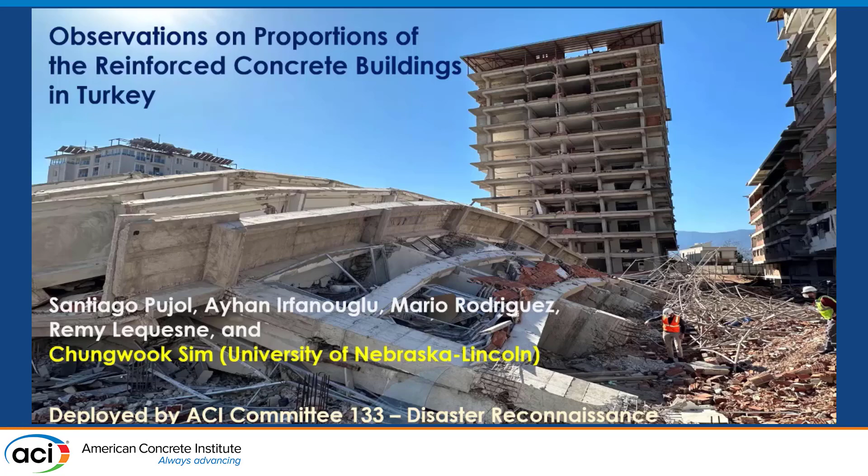I'm an associate professor at University of Nebraska-Lincoln, and these are our team members deployed from ACI 133 Disaster Reconnaissance Committee. I will present mainly our findings on the proportions of reinforced concrete buildings we observed in Turkey.

I may have a slight overlap, but I do want to touch on the fact that we were base camped in Gaziantep. We were visiting different cities that Remy mentioned, and he was mentioning the peak ground velocity demand exceeding the maximum considered earthquake.

These are the cities that we visited, and these dots are the buildings that we surveyed as a team of 40 members. So these are the cities that we visited, quite a lot.

The city of Antakya, which had the most severe damage you saw from Remy's presentation, is about 3.5 hours from Gaziantep, so we spent 2 days there.

So these are the 10 cities we visited. After the 1999 earthquake in Turkey, they installed a lot of ground motion stations along the fault line.

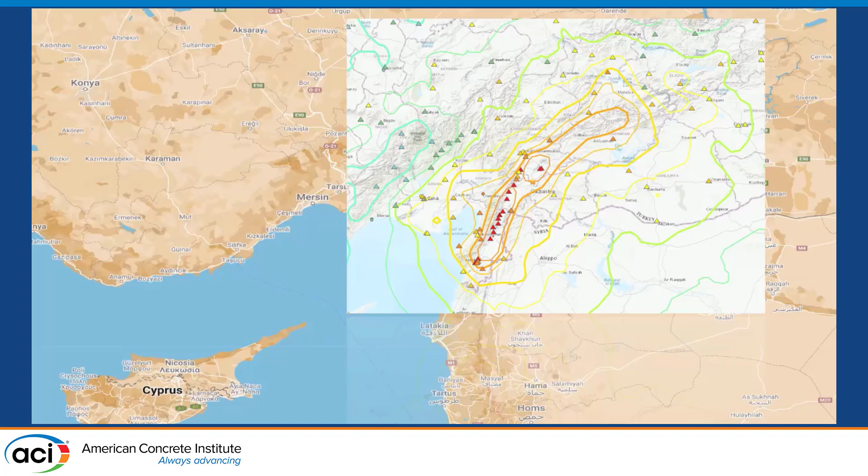These triangles are all the ground motion stations installed right next to the fault, where we can retrieve information on peak ground acceleration and peak ground velocity. This circle is where the first earthquake epicenter of moment magnitude 7.8 happened.

These are the cities that we visited. This was from the second earthquake, about 9.5 hours apart, with a moment magnitude of 7.5. Both earthquakes were huge, and some claim it can be considered a twin earthquake.

Before I start my presentation, I want to show a short drone footage of the building stock and development in some of these cities. You'll see a lot of buildings. I want to show this so that all of you can get a feel for what type of construction you can see in these cities.

Nurdagi was the first city that we visited from our base camp. A lot of 5 to 7 story buildings here.

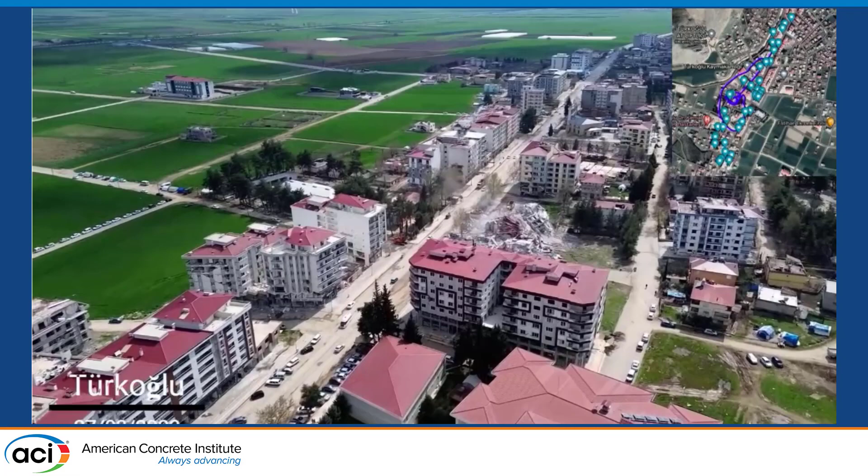This is Turkoglu. Along the street, you'll see again 5 to 7 story buildings, some entirely collapsed, some remaining with severe damage, either structural or non-structural.

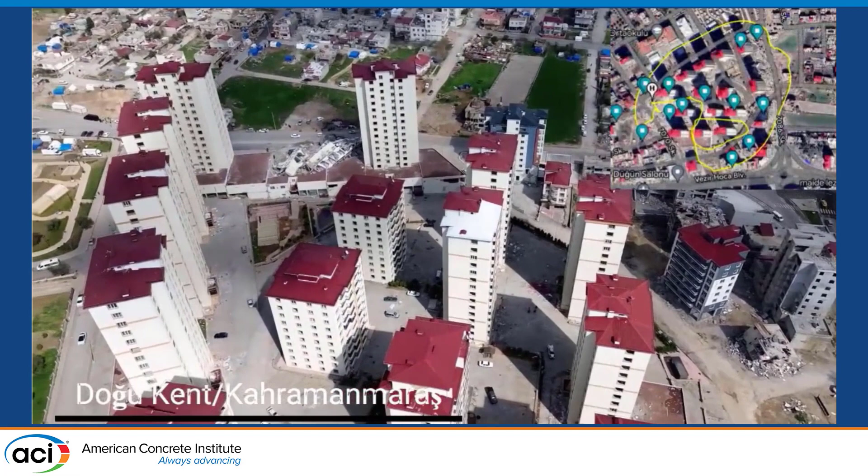This is another area where I'll talk about tunnel form construction, the question that was asked in the previous presentation. You'll see some buildings in this complex that had totally collapsed.

Antakya was in the southern part of Turkey, and you see a lot of damage here. The city is vacant, empty, so there's no one living here.

Either because there's a lot of structural damage, or even with buildings that have less structural damage, you see all the non-structural damage in the city. The city has been evacuated, and some buildings are scheduled for demolition.

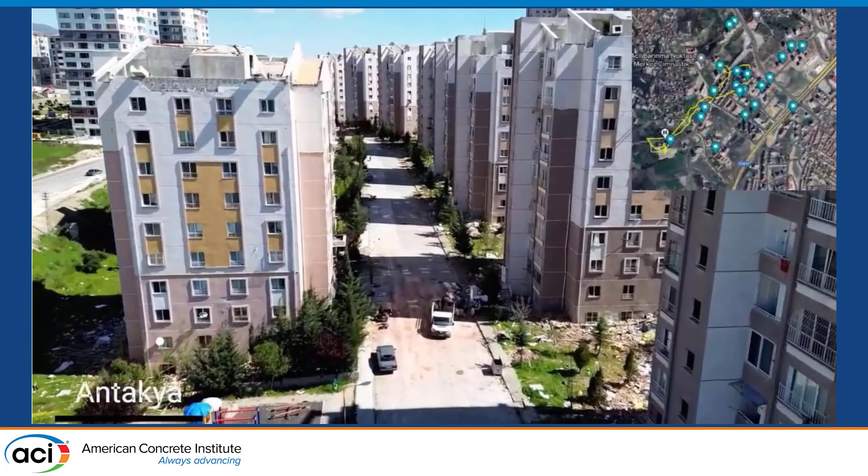So you see again 5 to 7 story buildings here. In the same city, Antakya, there are higher buildings, and the buildings that we surveyed while we were there ranged from around 2 to 16 stories.

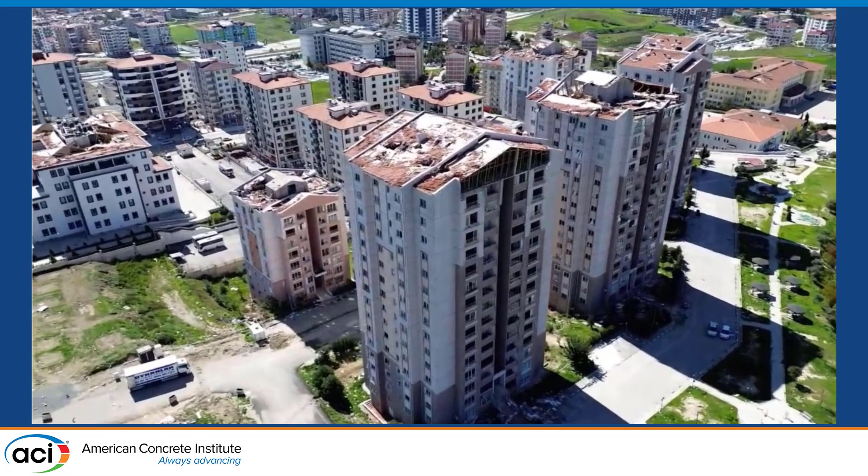So you'll see higher and more recently designed and constructed buildings as well. This is Antakya again, and you'll see some non-structural damage on the roof.

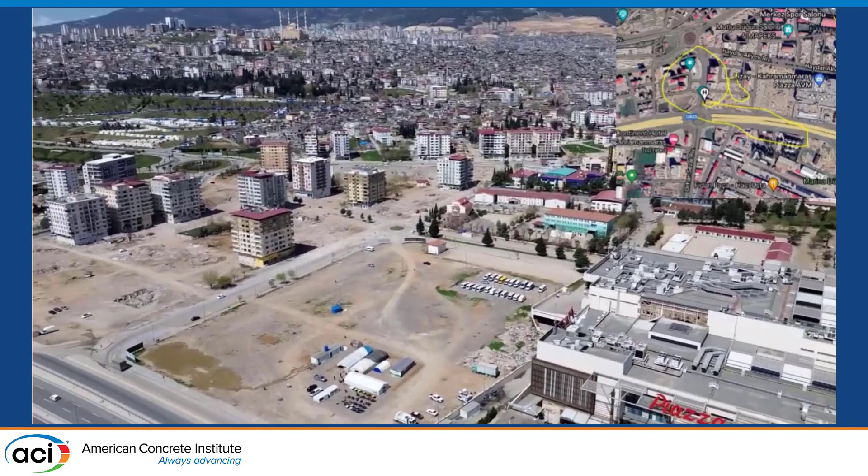We went back to Kahramanmaraş and visited there several times. If you go to the west side of the city, you'll see a lot of development and newly built construction compliant with the Turkish code after the 1999 earthquake. So you'll see a lot of newer constructions here.

I'm not going to go through all the cities, but I just wanted to show you how much building stock you're looking at. We visited 10 cities with lots of reinforced concrete structures, moment frames, tunnel construction, and shear walls. So this is a short video of the buildings that we visited.

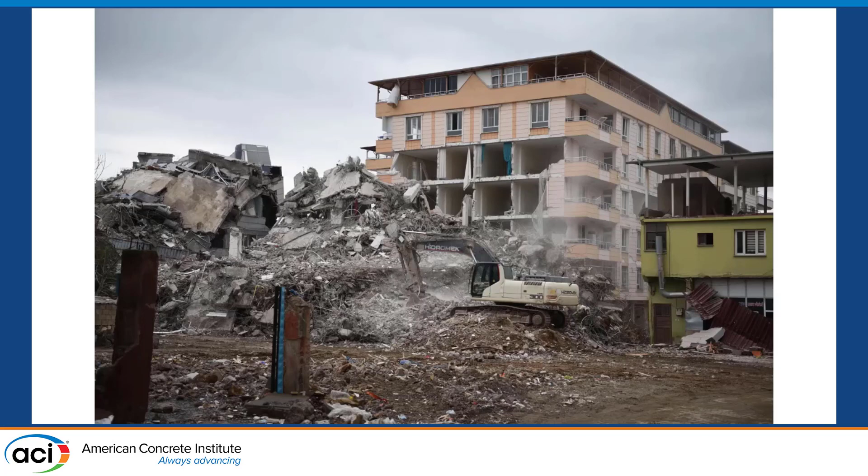Remy did talk about the ACI approach. There were a lot of buildings when we were visiting these cities that were totally collapsed. Obviously, we won't be able to collect any data from these buildings, but around these buildings there were others we were getting into.

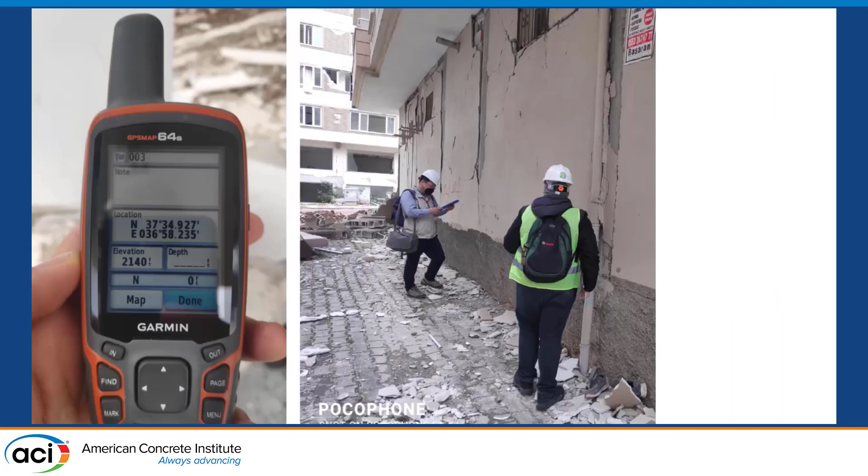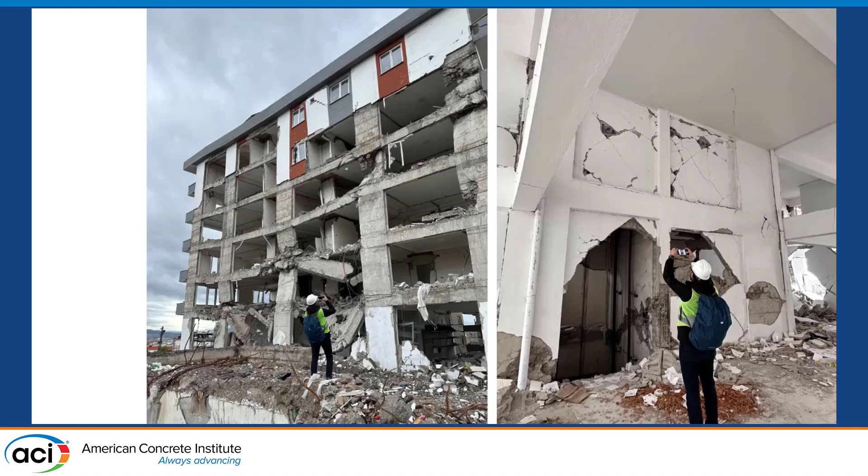We would record the coordinates, measure the distance between the columns, measure the dimensions of the columns and the walls, and take a lot of photos in and outside the building to document everything.

This building actually had light damage, but as you can see, all the non-structural masonry infills, unreinforced masonry infills, came out of plane. So there's no one living in this building right now.

So what do we do with this data? Why are we measuring the wall dimensions and column dimensions? Those of you familiar with the ACI 133 disaster reconnaissance efforts may already know about the wall index and column index, and maybe have heard about the Hassan index as well.

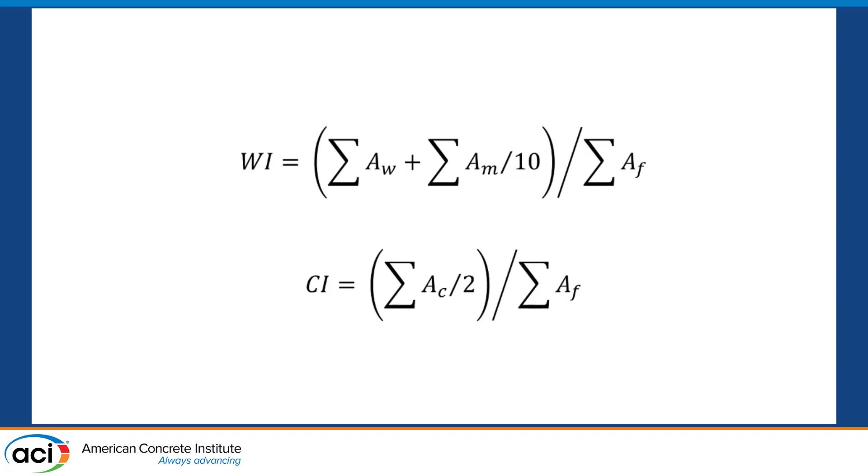Basically, we're measuring all the wall dimensions at the base, at the first level. For the unreinforced masonry wall, we only consider 1/10 of its stiffness, and we divide it by the total floor area multiplied by the number of stories, which represents the entire mass of the building, versus the stiffness at the base. So that's what the wall index and column index is.

How was the wall index and the column index of the 242 buildings that we surveyed? This is a plot where the black dots represent severe damage, and the white dots are other damage, either light or moderate. You see a lot of buildings don't have much wall or column and have a lot of damage here.

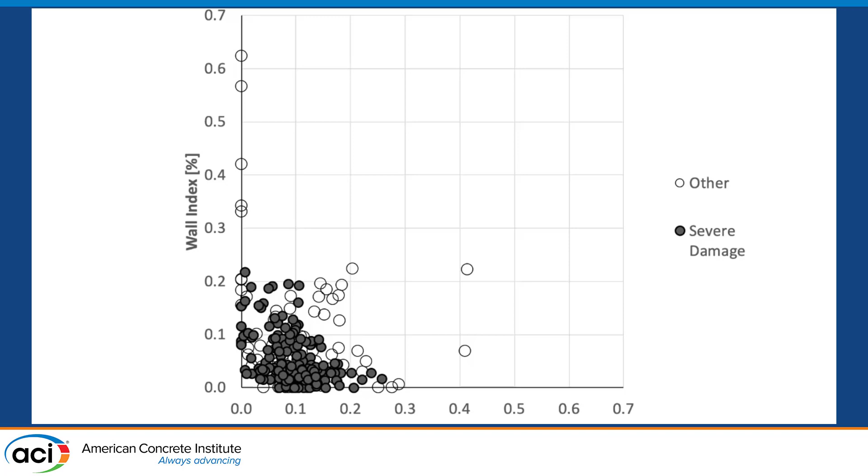So I will continue my talk and try to show you some observations on the field regarding the proportions. These are two buildings that were right next to each other. One had severe damage, one didn't.

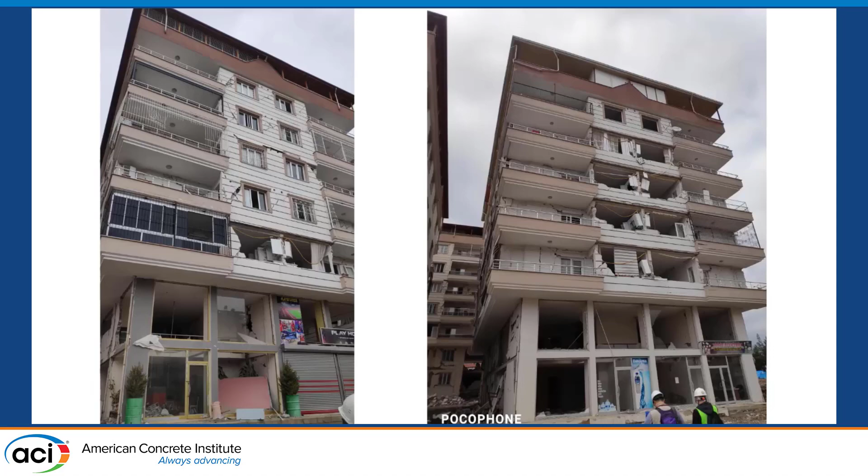This may be a repeat, but at the column base, as Remy mentioned, the details were not great. You would see longitudinal bars in the columns which are not confined at the base well, and sometimes you'd see a lot of buckling of the longitudinal bars at the column base.

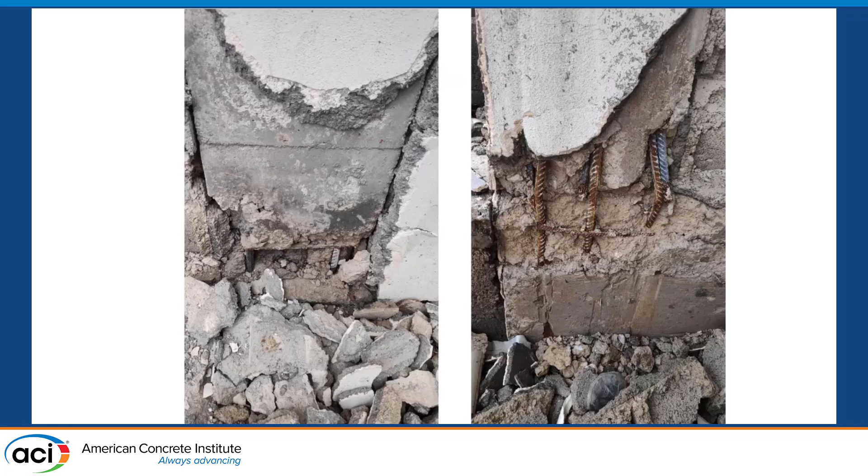We were walking around the building, and because the unreinforced masonry infills are all gone, you can actually see through, and we saw this shear wall in here. We walked in and measured the distance.

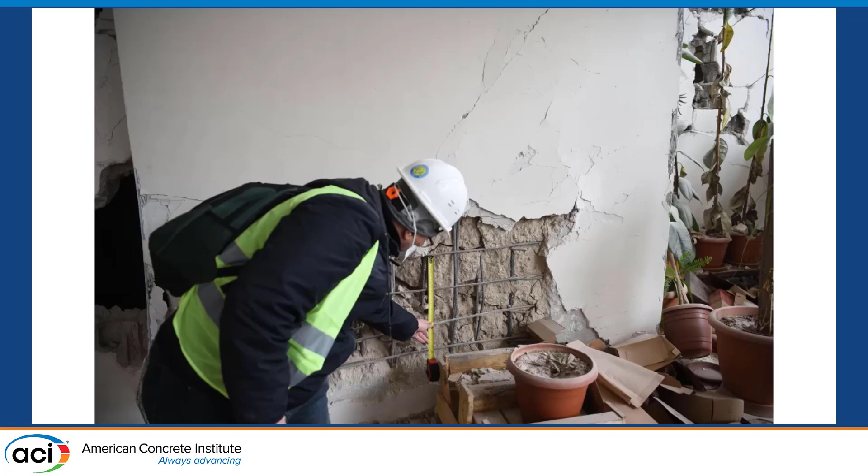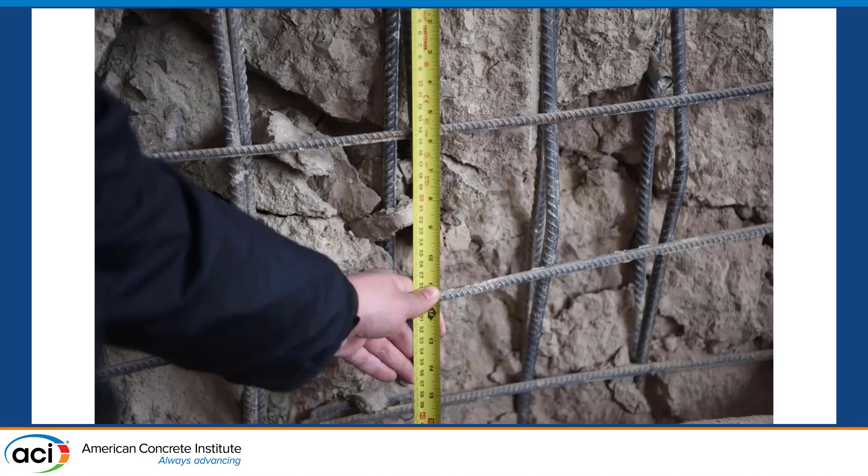The spacings are not great, but not bad. But not necessarily the best, because the longitudinal bars were not really tied together with the transverse reinforcement. Here you would see buckling of a couple of these longitudinal bars, eventually fracturing the bars. So this shear wall is gone.

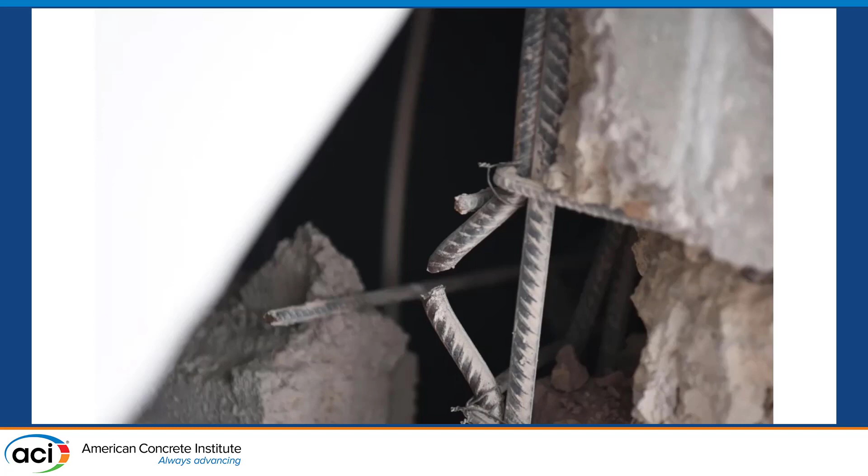This is this building, and from the wall index versus column index plot that I showed you, this is a building with the minimum of 0.03% wall and 0.1% column index. So that's where this building is.

The building right next to it is at the same dot, but behind this black dot, where there wasn't much damage with this building. This happens in an earthquake reconnaissance effort - you would see a building with the same design and construction, while one building right next to it would fail and one would not.

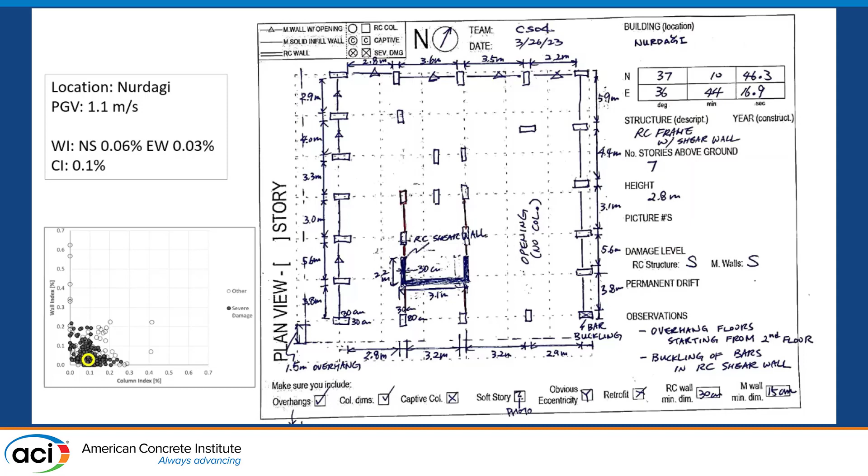But there are some slight differences here - the shear wall in the east-west direction is slightly offset, giving more eccentricity between the center of mass and center of rigidity, I guess. That may not be the reason it failed, but that's one of the two buildings we surveyed earlier. Again, from the same building, there wasn't much damage with the structural frame, but you would see masonry infill damage.

In Antakya, we were surveying this building here, and this building has slightly more walls, with this wall and column index. We started from this side of the building to survey, realized it's not a rectangular building, which is difficult to make measurements for, but we spent a lot of time here.

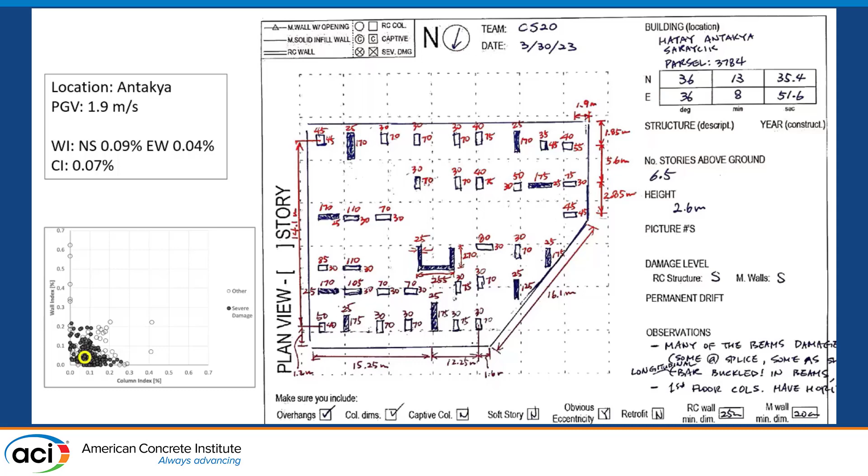You see a lot of shear walls - these shaded areas on the drawing are the shear walls, and you'll see the outlines of the columns. The shear wall was heavily damaged, but this is the building where I also have the same details that Remy was showing from the earlier presentation.

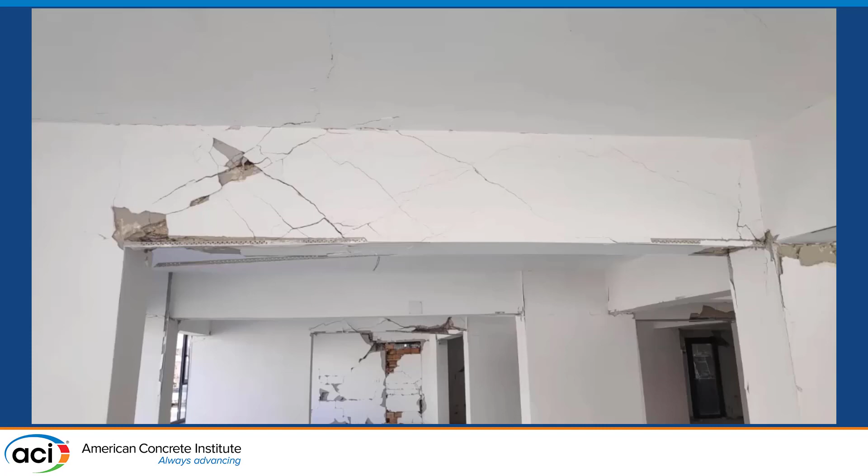Some longitudinal bars in the beams are terminating here where the crack initiates. Some actually initiate at the joint too, and we wonder what's going on. The bars are not connected through the joint, if you look at the bars.

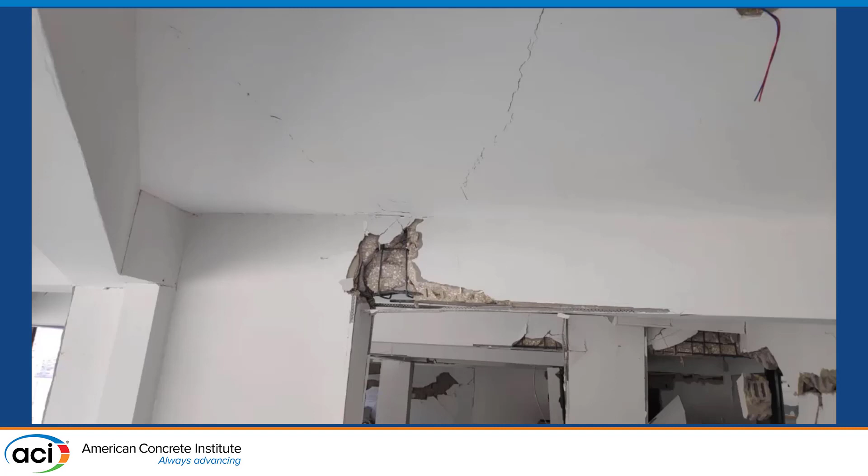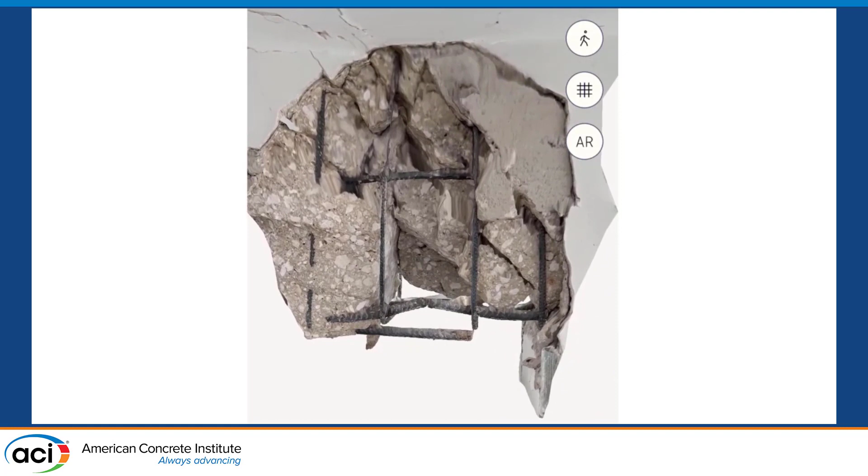There's a 3D LiDAR image taken from my phone, and you see the bars fractured here, and this bar here - it's not even in the joint.

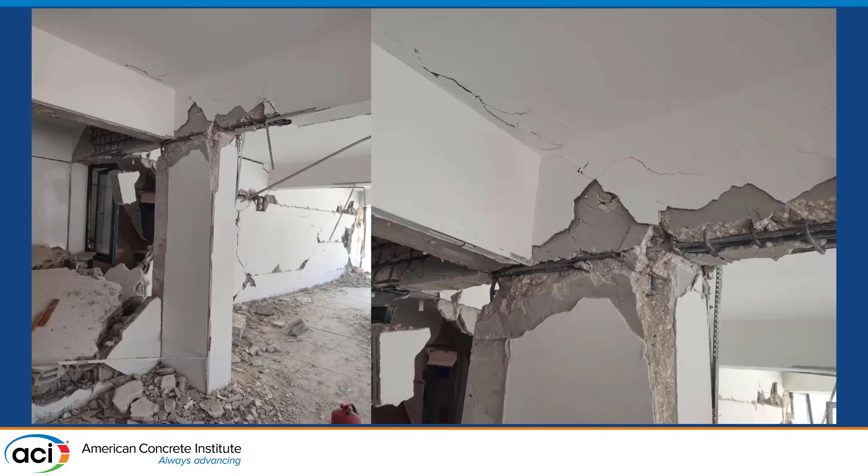So per the details that you would see, again from the same building, you would see details where the longitudinal bars in the beams are not really confined, and there's no spacing between these bars. So they're just sliding back and forth during the event and eventually buckling the bars in the beam.

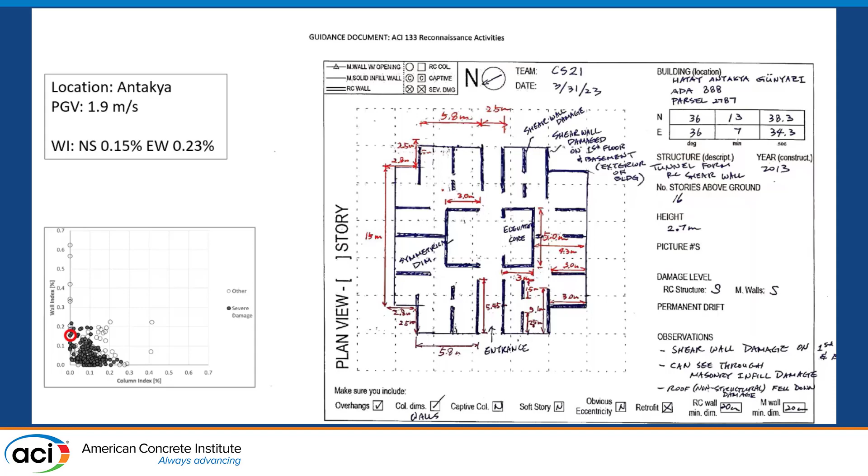Also in Antakya, there were buildings - this was probably an example of a tunnel form, a 16-story building with lots of walls in both east-west and north-south directions. This is the building here, but we still have severe damage in this building.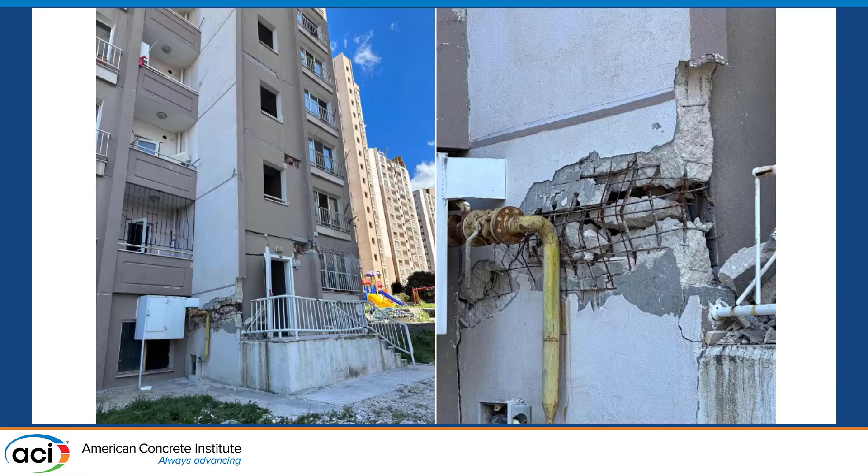In the first floor, we go down, and this was one of the fewer buildings where the transverse reinforcement doesn't really look like reinforcement - poor transverse reinforcement, and basically the core is gone. You see a lot of bars buckled, so this shear wall is gone. It has a lot of walls, but with the poor detailing, it didn't work well.

What about buildings that actually had good details? There were 3 buildings here, and I think Santiago will talk about this building as well.

The details were not bad compared to the other buildings that you saw here earlier. Wall index, the minimum is around 0.04%. This is an estimated drift, because Remy and Santiago made some measurements from the buildings that are still standing from the first floor, and the estimated drift was about 6%.

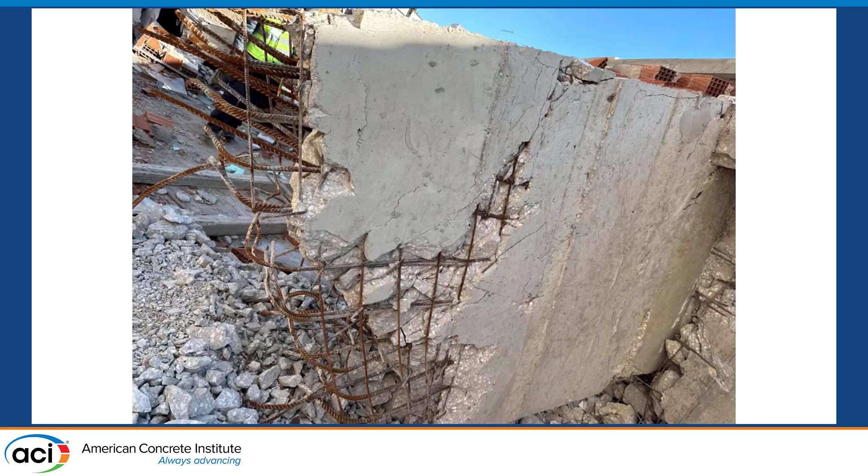So you go in here and you see better details, but the building is still overturned with a huge drift, and that's what I want to highlight here. So we were looking into these buildings. It went through a tremendous cycling, and you see all the damage and overturning.

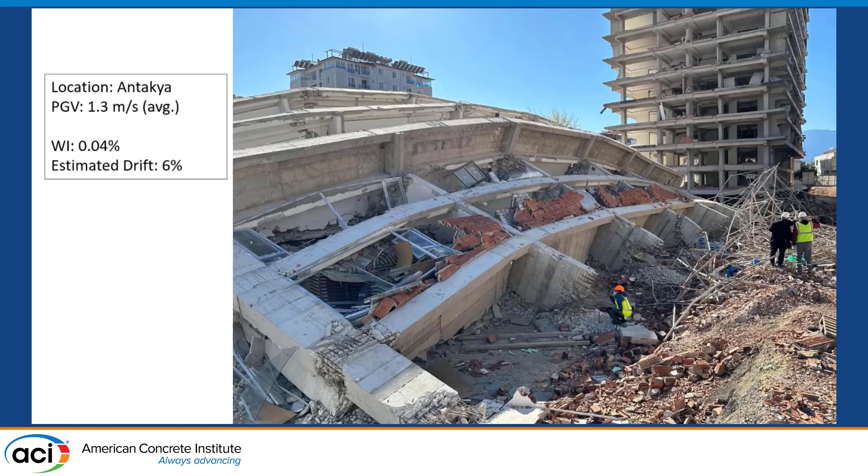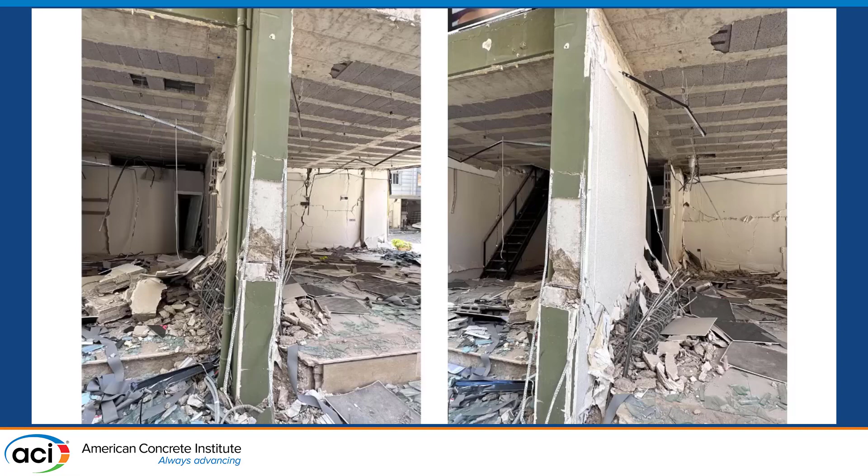Let me skip this one. But you see this wall basically shifted. It's similar to the building that Remy was showing, and all the bars buckled here. So a lot of movement, a lot of drift was happening in this area.

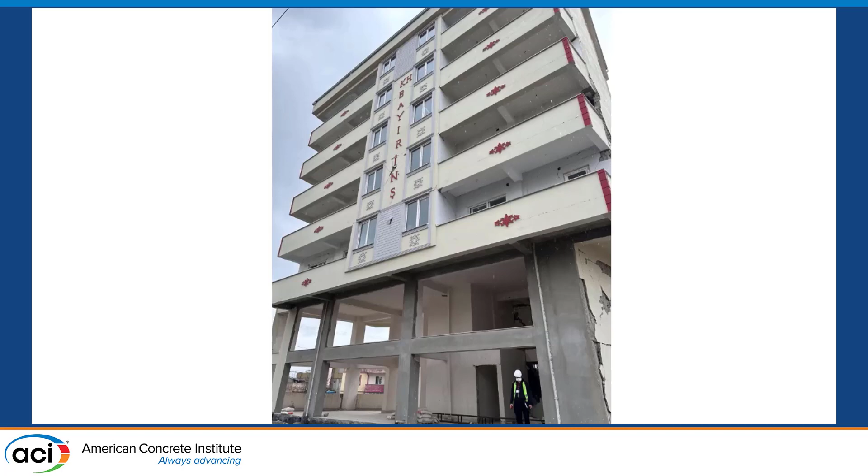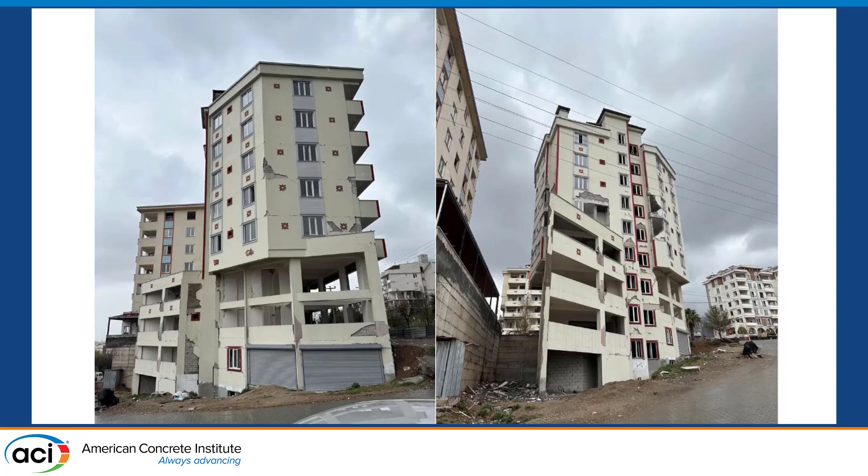What about some of the buildings that may have had more walls and maybe not be sure about the details? This time, not to make the mistake, we were walking around this building, and it has a weird configuration, as you can see. It's a building that I would not try to document, but it would take hours to make all the measurements. But we went in, and I don't know if you can see from the back, this shear wall basically has one hairline crack here. No damage. This building was clean, and we wondered what's going on. There's some cracks in the beams, but basically there wasn't much damage.

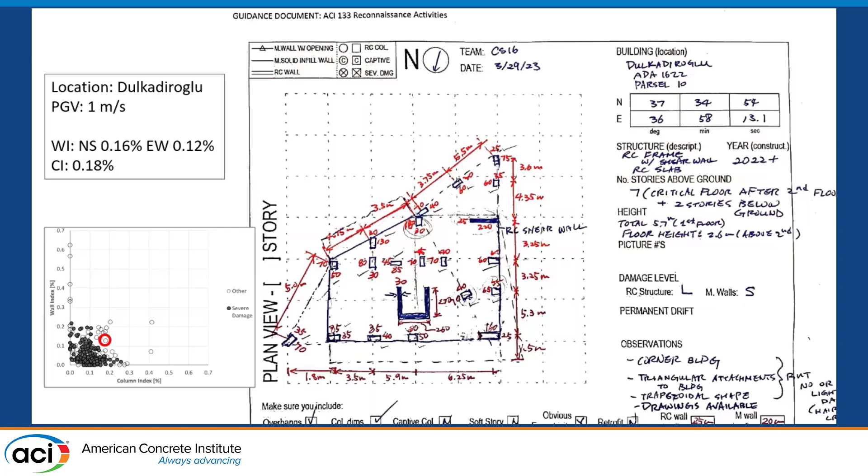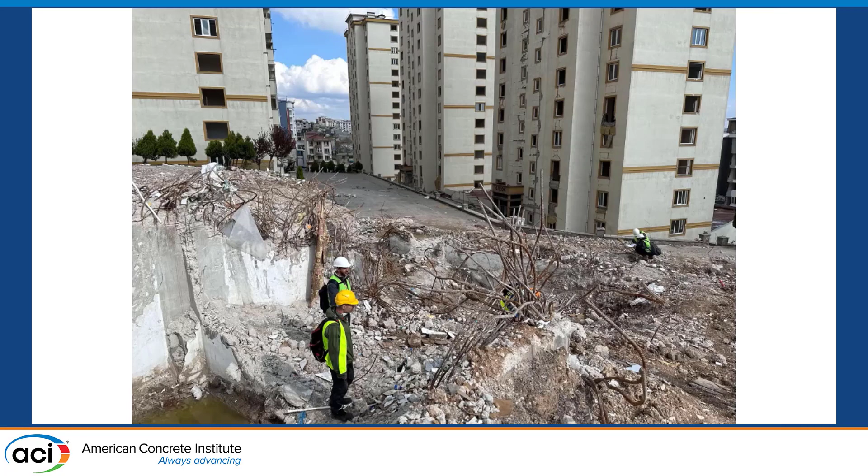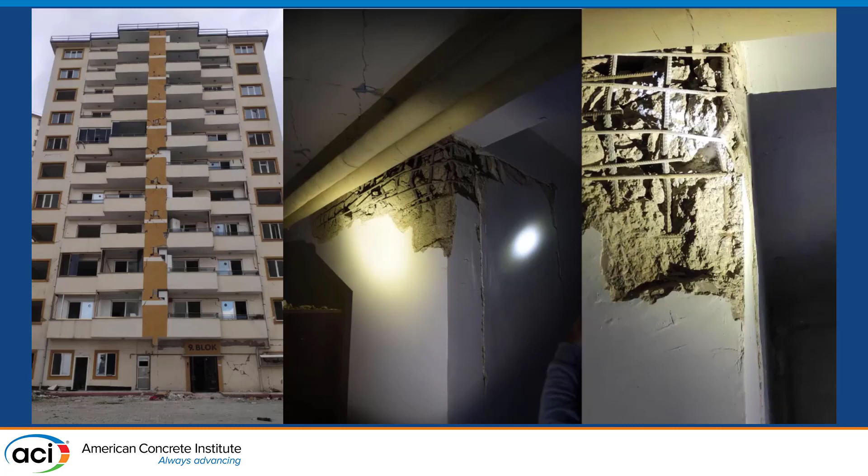Around Kahramanmaras West area, there were all these tunnel form buildings. Some of our ACI team members, Santiago, were looking at the splices, and some students were counting the number of bars fractured. But some of the other team members went inside the building to document it. I wasn't sure if I wanted to spend much time in this building where the two buildings collapsed, so I just went down and checked the shear wall, and it was heavily damaged.

But we were fortunate to actually receive a drawing about this tunnel form building. As someone asked before, there's lots of walls. But in this case, and some of the other buildings that were remaining, you see that it's only in one direction. East-west, there's not many walls, and these are all openings on this side. So this is the building in the wall index versus column index plot. You have lots of walls, which is definitely good, but you have walls only in one direction in this case.

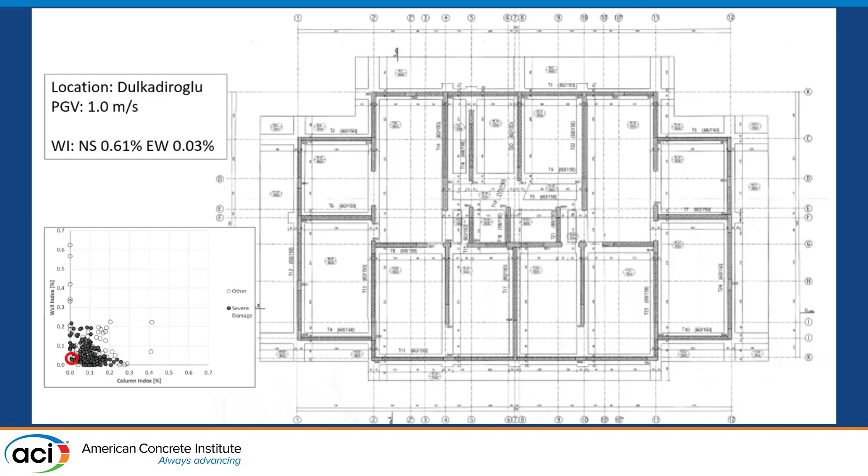These are buildings they call TOKI buildings, built and designed by the government for low-income population. And actually, these buildings did very well. We heard about it, we went there. I was fortunate to be able to enter one of the units, and this is the measurements that we made. Lots of walls in both directions, laid out in a symmetric way, and you see 0.74% and 0.57% wall index here.

And this is the building up here. So you put a lot of walls, and it survived. Actually, one story, we went all the way up to one of the units that allowed us to get in, and they actually offered Turkish coffee after we made all the measurements. The gentleman actually took photos and posted on social media. I didn't know that, but anyway.

So later on, we also received drawings, and the numbers that we calculate from the drawings are similar to this wall index.

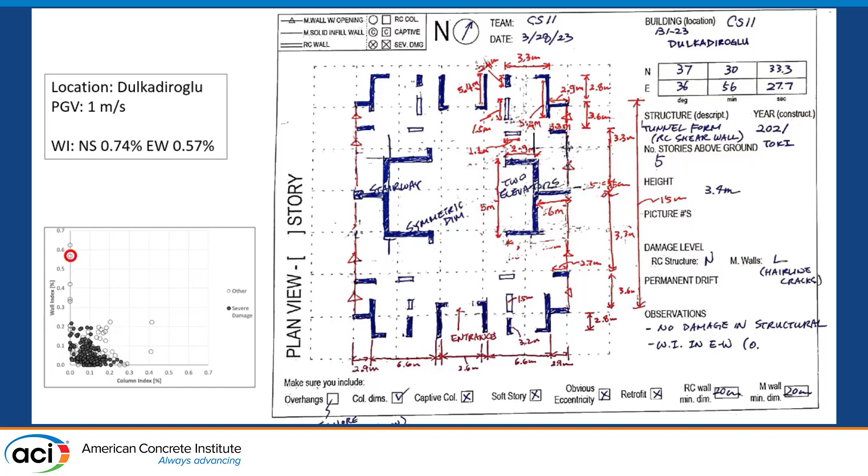So I want to make a summary here. We had a large team of about 40 people. We have full information about 240 buildings, 2 to 16 stories, surveyed from 10 cities over 11 days, so lots of work. You've seen examples where large drift demands and elements with inadequate detailing lead to structural failures. All of you know that. This is well known, and that's why we're making efforts to improve the detailing of our structures.

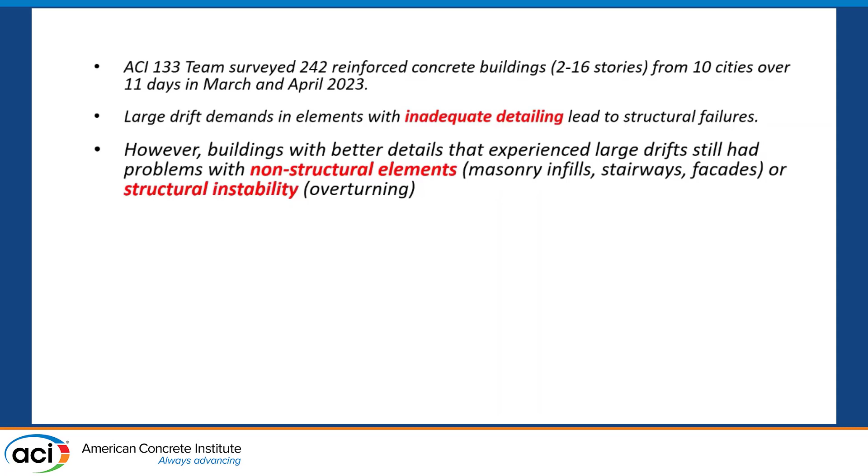However, some of the buildings with better details did have lots of non-structural damage with the large drift here. And you saw that building that had better details that overturned as well.

Not only from Turkey, but from several past efforts, we see that there is a clear correlation between the structural performance under earthquake demands and the number of walls and columns at the base, which contributes to the stiffness.

So buildings with smaller and fewer walls, as you saw from my presentation, are more likely to have structural and/or non-structural damage.

How do we survive? I think controlling drift by increasing stiffness, meaning putting a lot of walls. From our plot, and Santiago is going to talk about other earthquakes as well, if you have more than 0.2% wall of your total floor area in both directions, compared to the case when you don't have it in both directions which could be problematic, it will highly improve the structural performance regardless of the reinforcement details and the quality of construction. That's something important I want to highlight: if you put a lot of walls, the building will perform much better, regardless of the details and construction quality.